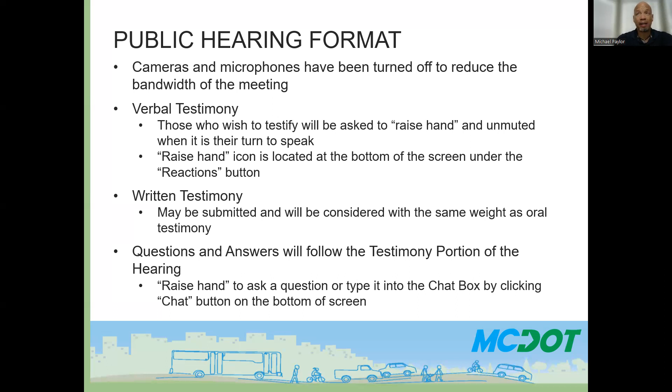Tonight's hearing is being held pursuant to Section 49-53 of the Montgomery County Code. The purpose of a public hearing is to obtain resident testimony and comments regarding the potential project to assist in determining if the project is in the best interest of the public and whether or not it should be authorized for construction in its entirety or any portion thereof. This forum allows you to provide testimony either in support for or in opposition to the project. Testimony and comments received may influence the final design.

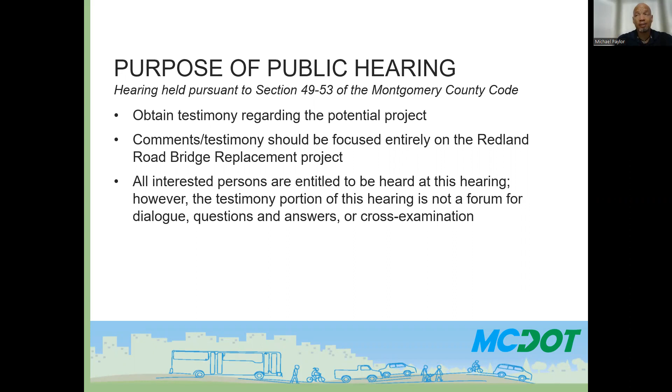Your testimony and comments should be focused entirely on the project, which is the topic of discussion. All interested persons are entitled to be heard at this hearing. However, the testimony portion of this hearing is not a forum for dialogue, question and answers, or cross-examination. Please direct your remarks to the specific project that is the subject of this hearing. If comments stray into areas not related to the project, I will ask that you refocus your comments to the subject project.

Following the conclusion of this public hearing, the record will remain open for one month to allow any person who is unable to attend this hearing an opportunity to have their comments included in the public record before we consider. The official closing date by which written testimony and comments must be received is Friday, July 7th, 2023 at 6:30 p.m.

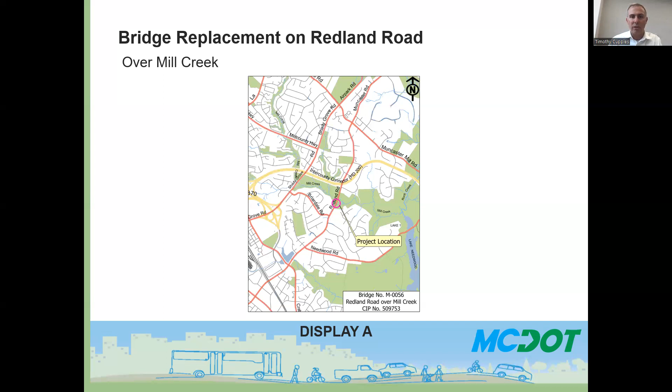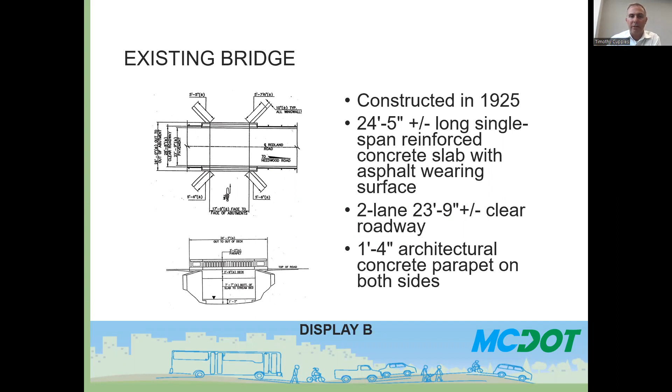Display B provides a quick review of the existing Redland Road Bridge to be replaced. The existing bridge was constructed circa 1925 and is composed of an approximately 24-foot 5-inch single span concrete slab with asphalt wearing surface. This structure carries a 2-lane 23-foot 9-inch clear roadway with a 1-foot 4-inch concrete parapet on both sides for a total out-to-out width of approximately 28 feet.

Display C includes example photos of the existing deterioration at the bridge referenced from the 2019 bridge inspection report. The bridge currently exhibits several areas of delaminated or spalling concrete, and in addition, the opening beneath the bridge is undersized for a 25-year storm event.

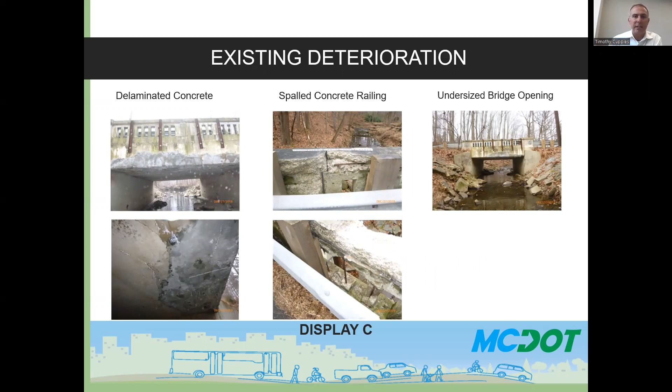Displays D1 through D3 present the scope of the proposed work. One is to replace the existing bridge with the proposed structure. This includes removing the existing bridge deck, abutments, wing walls, and foundation. The proposed structure is a 37-foot long single-span bridge, which includes a new foundation, abutments, wing walls, pre-stressed concrete solid slab beams, and concrete wearing surface.

The proposed bridge width of 48 feet will accommodate a future shared use path that is part of Montgomery County's master plan for this area. Multiple utilities will be relocated prior to bridge construction in order to facilitate the work.

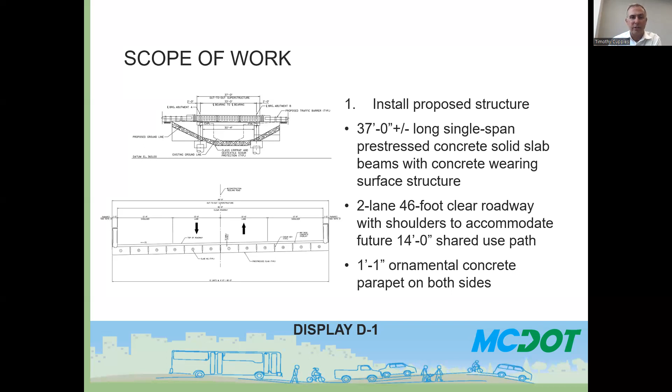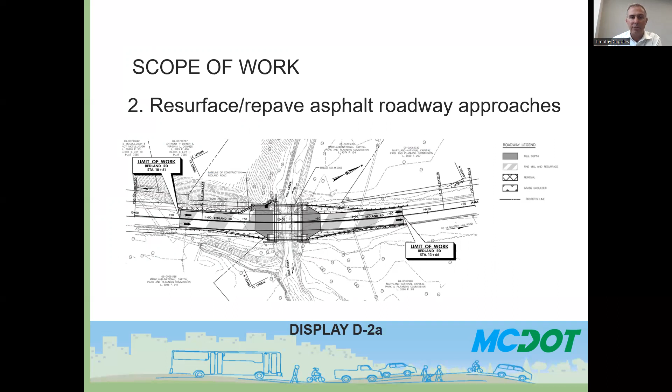Two, we will resurface and repave the asphalt roadway approaches to align with the new bridge. Three, full depth roadway installation is required adjacent to the bridge, while the roadway will be milled and overlaid approximately 100 feet from either end of the full depth sections.

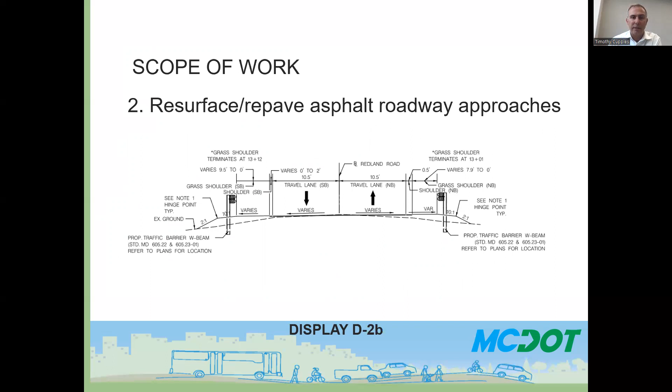Three, we will perform stream restoration work to Mill Creek. After construction of the bridge and the roadway is completed, the stream will be rehabilitated to provide an adequate aquatic habitat with erosion-resistant features.

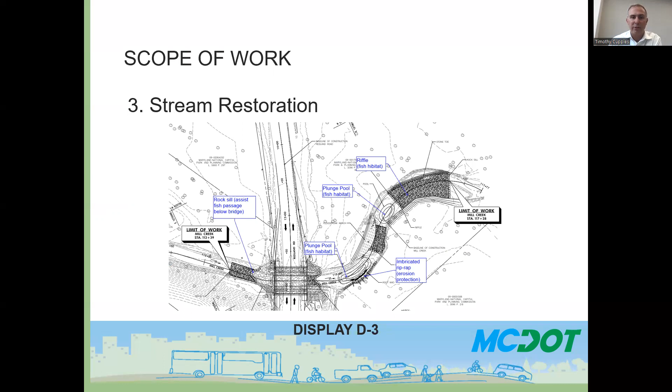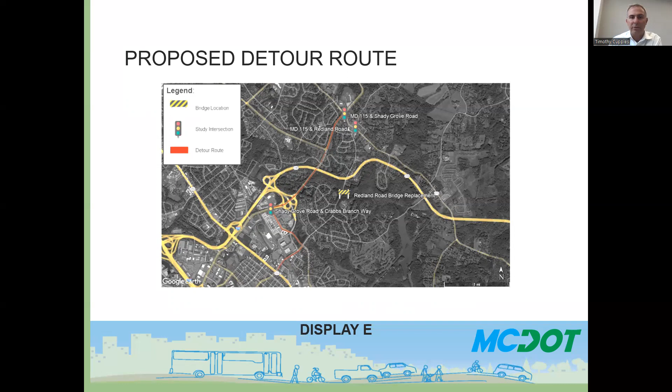The bridge will be closed to traffic during construction. Display E depicts the proposed vehicular traffic detour route for the maintenance of traffic during construction. The proposed detour road, shown in red, follows from south to north: Crabbs Branch Way, Shady Grove Road, and Maryland Route 115, or Muncaster Mill Road. Proper temporary traffic detour signage will be installed for both directions along the detour route.

The total project cost is currently estimated at $3,500,000, including engineering, construction, and construction management costs. The acquisition of funding is underway and is anticipated to be included in the 2025 MCDOT budget, that's fiscal year 2025.

The design of the project began in the fall of 2021 and is expected to be completed in the summer of 2024. The construction is anticipated to take approximately 12 to 16 weeks in the summer of 2025, pending approval of funding.

This project is using accelerated bridge construction techniques in order to limit the road closure to summer months, as Redland Road is a vital bus route for the public school system. Scope items, such as some utility relocations and stream restoration, can be performed without a road closure.

The project cost, funding, and schedule are subject to change as the project progresses until it's complete. Pursuant to Section 49-52 of the Montgomery County Code, there are no properties which are considered to be specially benefited by the proposed improvement. Therefore, no properties are expected to be assessed.

Several exhibits are incorporated in the public record binder for your information and consideration. These include the approved fiscal year 23 project description form for capital improvement program number 509753, Redland Road Bridge number M0056, design plans at the level of 60% completion with the latest revisions, and the 2019 biennial bridge inspection report.

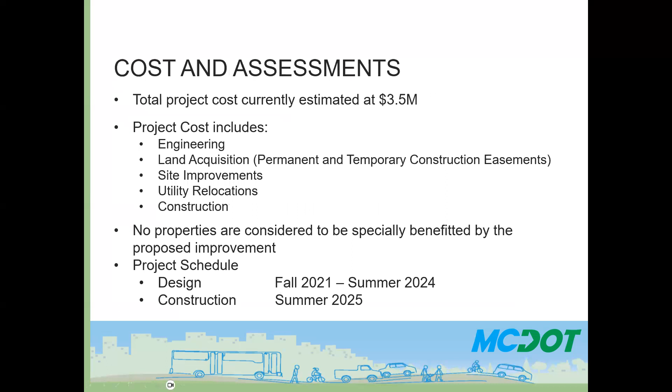One of my concerns is that road is currently used as a cut through to get to Redland Road. I saw the picture of the detour and I'm wondering if it could be enlarged so I can see it. My understanding through email was that the detour would not go through Founders Mill Drive, but that it would be on roads of a similar structure to what Redland Road is now. So that's my concern, what the detour will be.

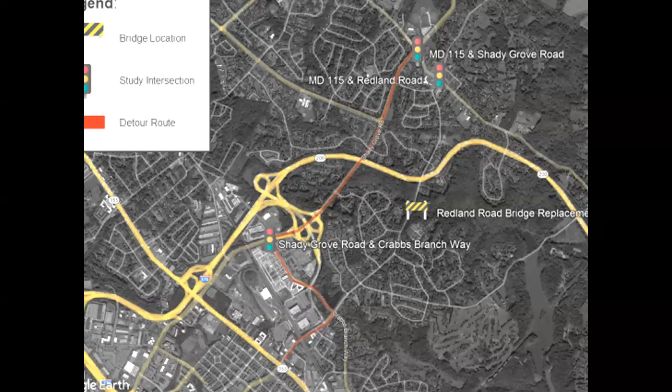I didn't have a chance to really study the exhibit, but it looks like the bridge may be wide enough for sidewalks on both sides of the road, which seems prudent, to allow for sidewalks on both sides in case they want them eventually. I would suggest, since you're going to have a bunch of the road closed now for a long period of time, just go ahead and build a sidewalk on one side of the road while you're doing the construction.

So the second point I wanted to make is about the map with the detour. I didn't give my address: it's 16533 Baderwood Lane. I'm concerned about the potential for cut through traffic through Parkside Estates, namely on Baderwood Lane and on Briardale Road, because that's kind of the obvious, shortest route.

If you're coming up Needwood and you turn right on Redland and head up towards the bridge that's closed, you're probably not going to reroute yourself back to Crabbs Branch. You're probably just going to cut through on Briardale or Baderwood. So my concern is that even with an official detour route, people may not follow it and may cut through on Baderwood or Briardale. I'm also concerned about what mapping programs like Google Maps will show, and whether they'll route people on the official detour or on the shortest route through Parkside Estates.